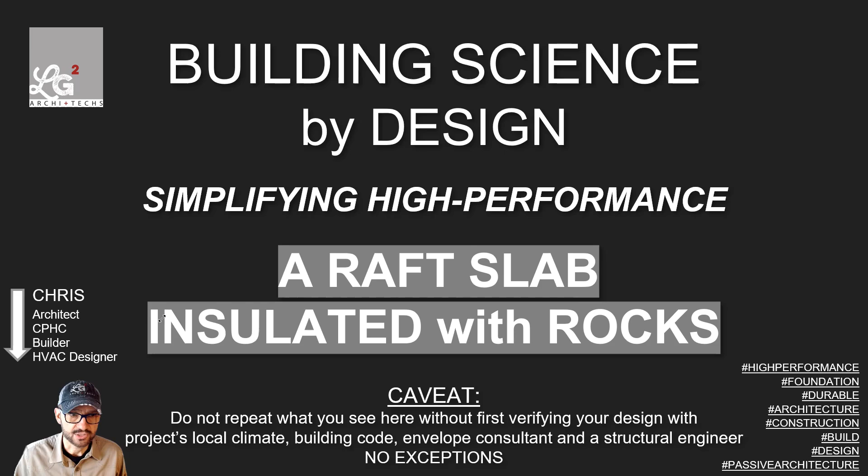So getting into it, this is just a reminder. I want to make sure that everybody watching this understands that this is a detail that works for our projects, and it works for the soil, the climate, and everything that we're doing on our projects. Wherever our projects are, this can work. But I would recommend not using this detail for your project exactly the way it's drawn here. Get with your own team, get a geotech, look at the code, make sure you understand your climate, and make sure this detail or some version of it is what you need for your project. So just a good thing to get started on. Make sure you design it for your project.

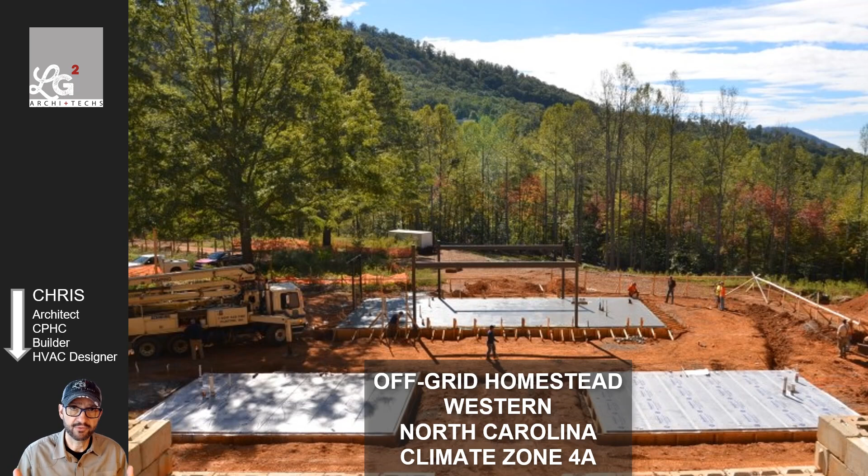So as I said, we had a slab on grade detail that we've been using for years. This is a project in Western North Carolina. It's off-grid. Three simply shaped structures with this robust slab that we've got here. This is a fully insulated slab. The turn downs are insulated, under the slab is insulated, and it's all insulated with stone wool except for one portion, and I'll show you that in a second.

The off-grid project had 8-inch slabs on each of those pads. They were looking for something that really was going to stand the test of time, so we went to that level of design. Then this turn down is 22 inches from the top of slab to bottom, and it sits on a continuous layer of EPS, a type 6 EPS. You can do type 4. It also has the right bearing capacity. We go to type 6 because there's a trivial increase in cost, and because we can. This is borate treated.

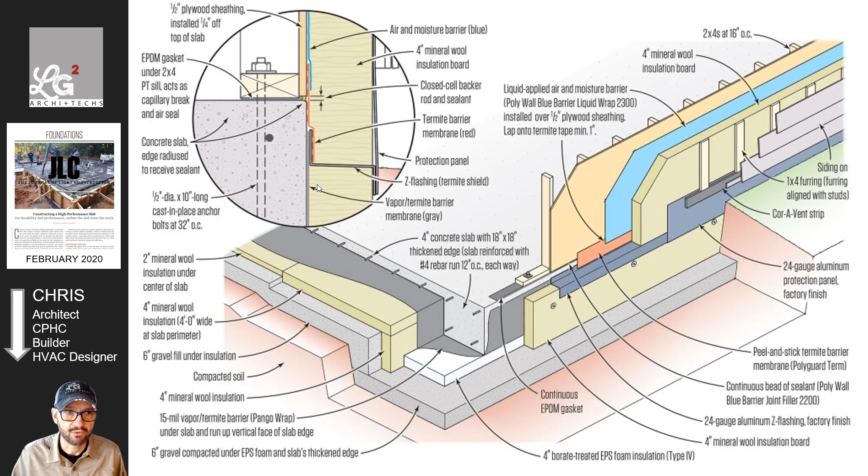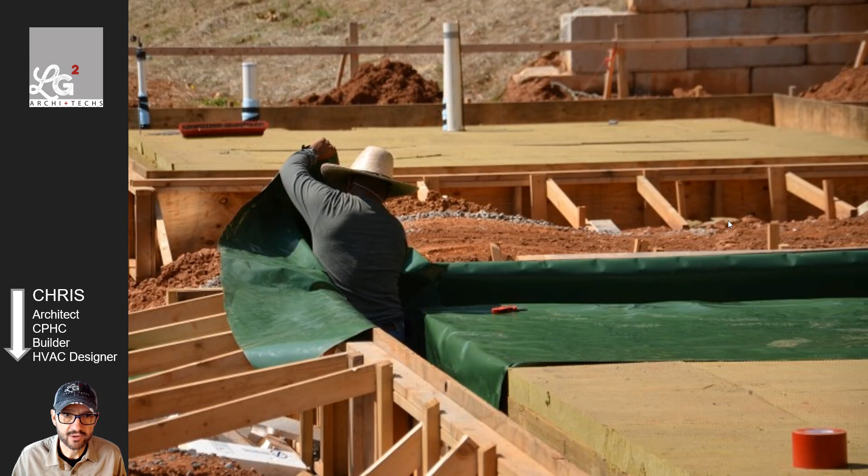So this is our crew putting in the vapor barrier. And there were 4 or 5 surfaces there. They had to work their way around with the vapor barrier, and all those corners had to be nicely folded, and then all the seams taped perfectly, so we didn't have any vapor intrusion, but potentially even critter intrusion. So it was tedious work.

It was worth it, and this is still a great detail just about anywhere in the world. So it's just a matter of matching your climate, your soil conditions with your reinforcement and your insulation and your budget too.

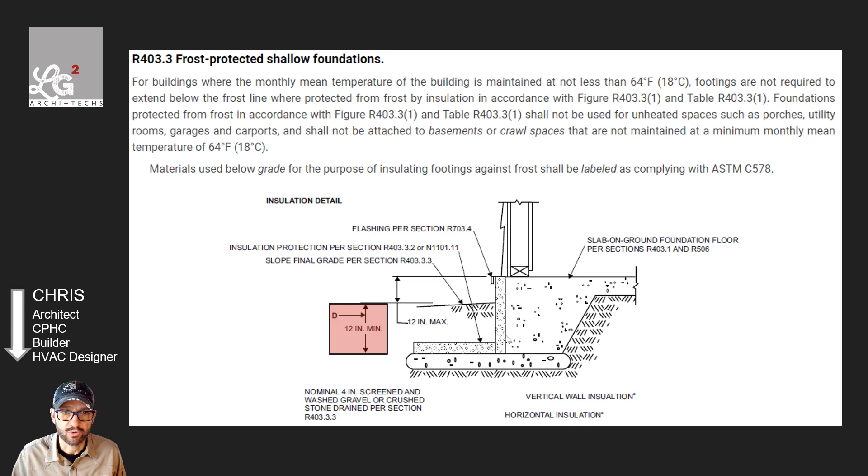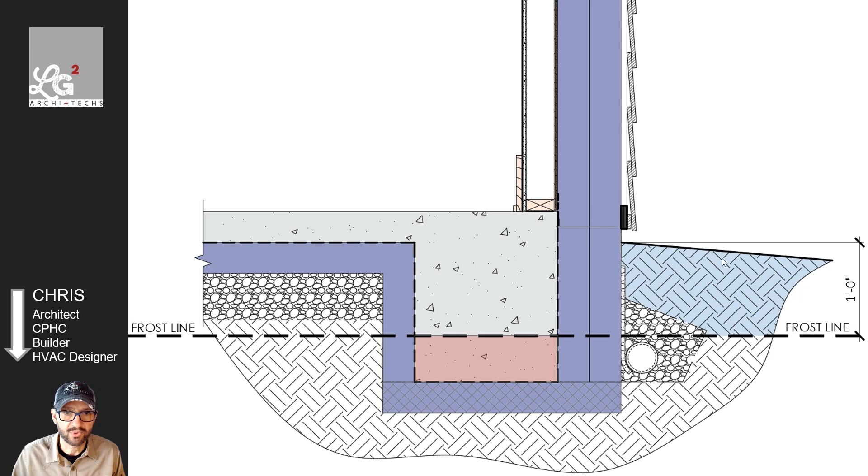So this is that same detail, just showing how we are below the frost line with our slab, with our turn down. And this is the frosty soil area that we're trying to protect our slab from. One of our engineers had a really good analogy of what this turn down is doing for us. He said it's basically creating a wedge between our frosty soil and our building to prevent any damage to the foundation, to our slab.

And so since this is not freezing temperatures in here, it's not full of water and expanding, assuming you've done all the other designs appropriately and you don't have a high water table. This is all dry and warmer because it's below the building, and out here it's exposed to the elements, and you're getting down to maybe 10 degrees, and that's a big temperature difference between inside and out. And so this area can expand if it's moist, and that's one of the main points of getting below the frost line.

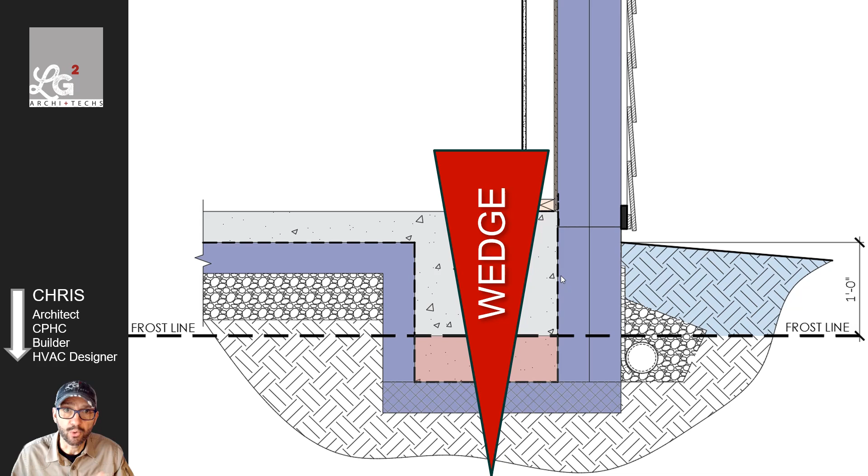Just one other thing, some parts of the country require continuous insulation at the slab edge. Here in Georgia, we do not. I'm just pointing that out. We don't need to have this insulation. This is about high performance. It's about passive buildings. It's stopping that heat flow through the concrete, which is one of the most thermally conductive materials that we build with.

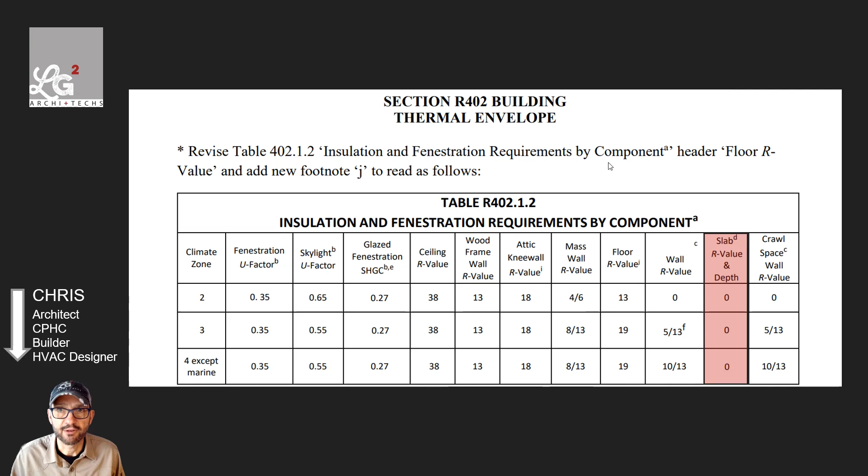So we want to insulate that edge and stop that heat loss, which can be up to 10, maybe even 15% of the heat load in a building, depending on the design, the building and the location. There's a significant benefit to having that slab edge insulation.

Let's talk about the perfect wall real quickly. The perfect wall, which is also the perfect floor and also a perfect roof. And then when you tie it all together, you have a perfect enclosure. And what makes it a perfect wall is that it has all of the key control layers, which are considered to be water, air, vapor, and heat.

We like to add in there UV as a control layer, fire as a control layer, and aesthetics as a control layer. That's the architect side of me talking there. But we want to control all these, then you have a perfect assembly, which is the wall, roof, and floor, and then you have a perfect enclosure. So I bring this up just before we get into the details of our design for this slab, because it is a perfect floor, and then how we're tying it into the perfect wall in an uninterrupted, continuous way.

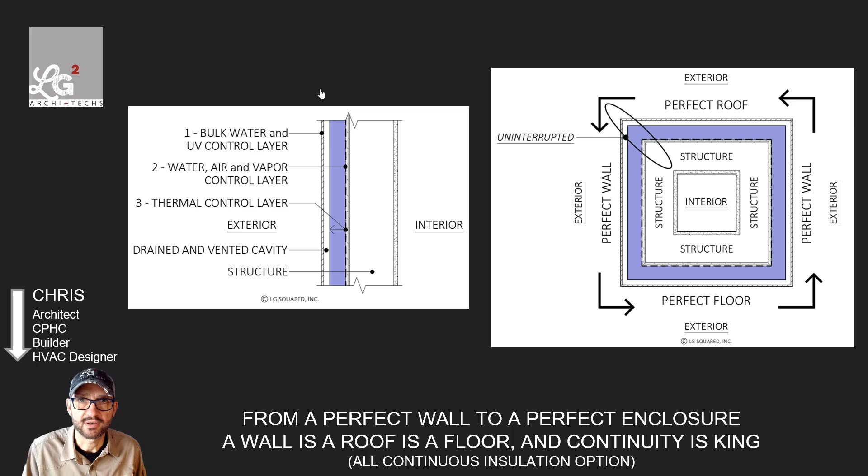So this is our slab-on-grade assembly that we're talking about. Now this is just more in the middle of the slab. Generally, this is our detail that describes the assembly. 8 inches of concrete, 4,000 psi with number 4s at 12 inches on center each way. This is an important part of this design to help simplify it.

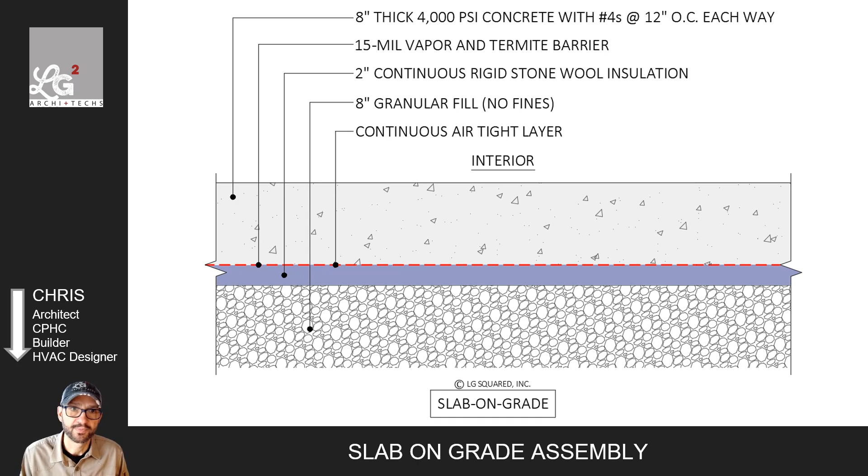We've got our vapor barrier, continuous insulation under the slab, minimum 2 inch up to 4 inch. In our climate zone, we get down to maybe 40, 50 degrees in our soils, so having a lot of insulation down there doesn't make as much sense as, say, up north where the temperatures get much lower. Then we have our 8 inches of granular fill, and there's a reason we've doubled that as well.

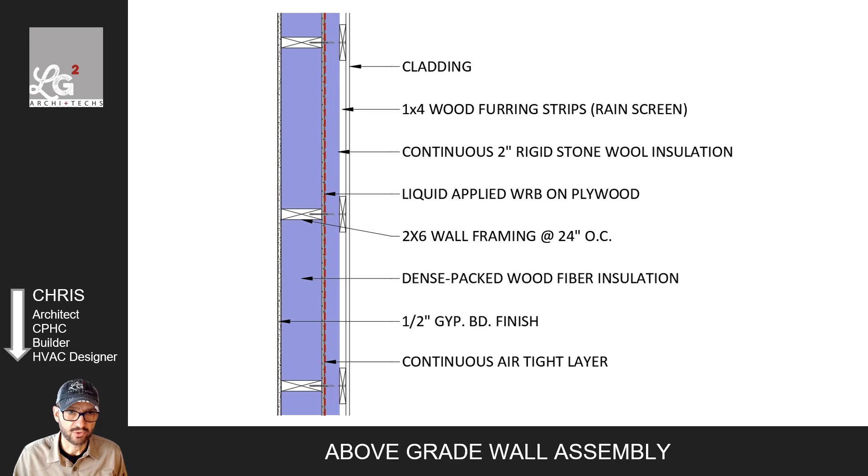And then this is our above grade wall, just showing this because we'll show how this ties in to our slab in a minute. We've got the continuous insulation, cavity insulation as well, and all of our control layers are still right here at the sheathing. Just a quick look back at the original detail before we look at our new slab edge detail. So here it is, 8 inches all the way to the edge.

Absolutely no turn down. All the buildings we're using this slab on are 1 to 2 story. This can go up higher than 2 stories. You have to talk to your structural engineer about the thickness of the slab, the rebar, the soil underneath, the gravel. Everything has to be specified to make it work for 1, 2, 3 stories.

But this 8-inch slab goes all the way to the edge as 8 inches, and then we're sitting on stone wool insulation under the entire slab still. No foam anymore. I'm getting rid of that foam. We're using a higher density stone wool right there at the point loads, which is the exterior above grade wall at the perimeter, but anything inside also gets that top rock. It's a load-bearing condition, so the top rock goes underneath, say, a load-bearing wall in the middle of the house.

So these specs down here are what you would give to the structural engineer, and they would use that in their calculations, in their design. And the same with this here. This is a Comfortboard 80. That goes everywhere else that we don't have point loads under the entire slab. The reason we've got 8 inches of gravel underneath all this is to get us down to the frost line.

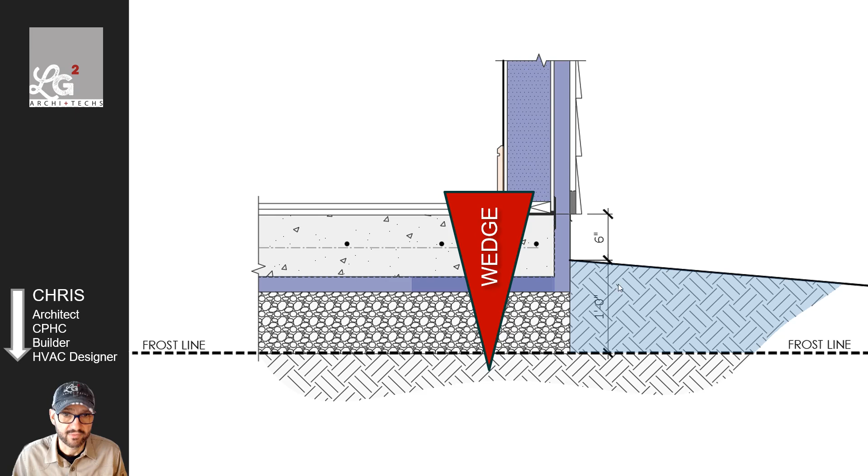Now, do we really need to get down to the frost line here? We've created our wedge here, right? So we've got our wedge; the insulation, of course, is insulating the slab edge. We've got our frosty soil here, buffered by insulation and by gravel. We typically do 6. We're just going the extra 2 inches to get it down to that 12-inch frost line. We've got our wedge, we're protected.

By doing this entire slab 8 inches, we've eliminated all that trenching and all that origami with the insulation and the vapor barrier, no beams in the middle, and it works, and it simplifies it. Not saying it works everywhere on every project, because every situation, every project is different.

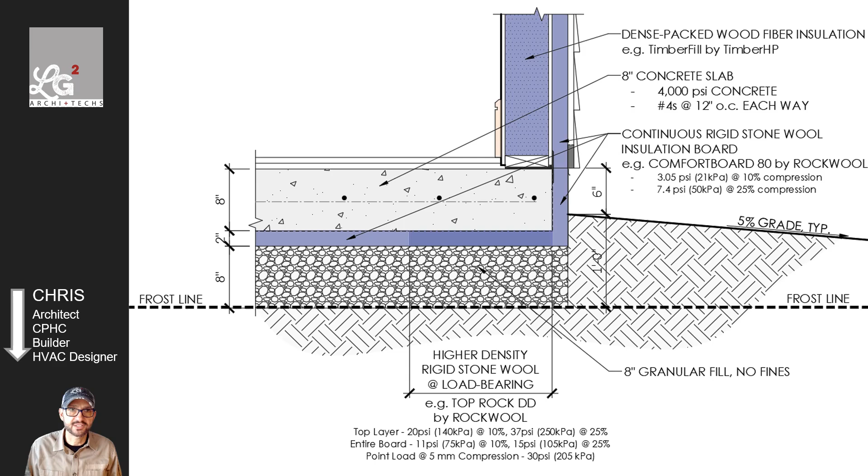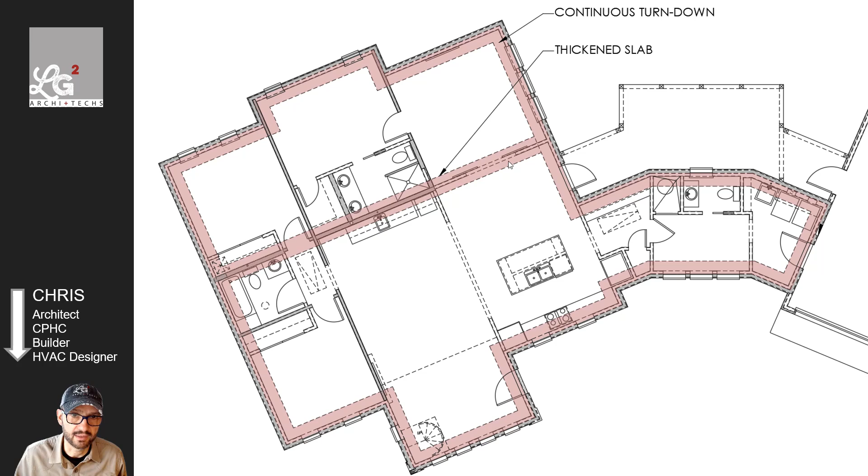So talking about reduction of material, this is a look at one of the projects we did the turn down on in Marietta, and the red is the turn down, and then the thickened area down the middle for the structural, that's a bearing wall down the middle. So if we take that and calculate the amount of concrete in that slab versus an 8-inch slab, we've got less in the 8-inch slab than we do in the slab with the turn down, so we're saving as much as 16 yards on this project.

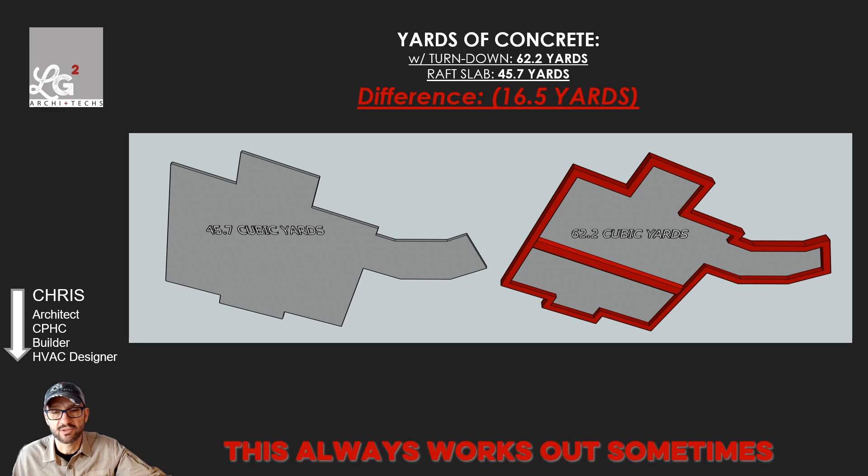That's not always the case. Sometimes it's a wash. It's the labor of all the trenching and wrapping the insulation, the vapor barrier, that's the real savings here. Always consider your own climate zones, your design, your soil bearing, building codes, everything. Just make sure that whatever design you come up with, whether it's this one, similar to this one, or something different and innovative, whatever it is, just make sure it works, and you've got to get the right people involved.